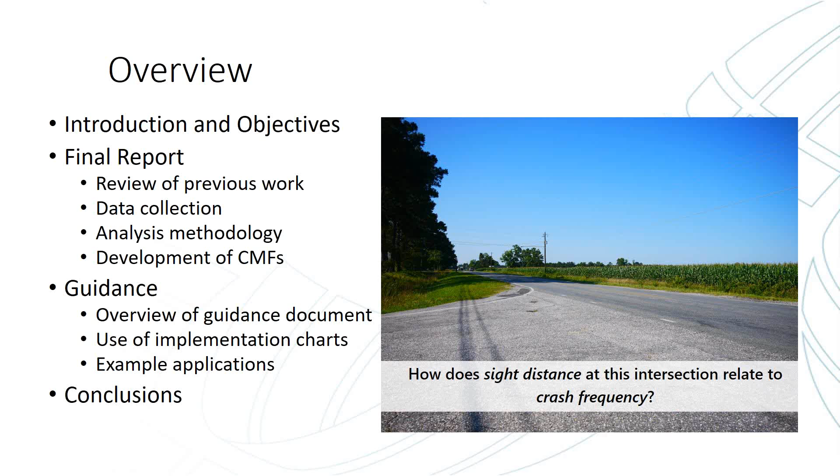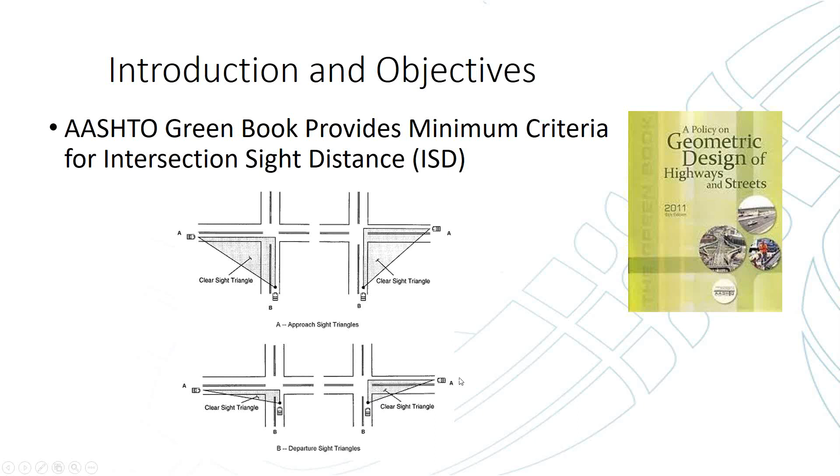If there's a horizontal curve present, we're not actually measuring the hypotenuse of this line, but we're measuring this longitudinal distance on the major road itself, which I'll talk about in greater detail. The criteria themselves can vary according to the minor road traffic control, so we're going to be focusing on case B, which is the departure triangles shown on the previous screen.

They also differ based on the design speed of the major road in which the turning movement is being considered. For example, case B1 in the Green Book gives criteria for left turning vehicles from the minor road. The criteria are based on gap acceptance behavior at this point, and so the criteria can change based on whether there are tractor trailers expected to use the roadway, as well as the minor road approach's grade, which can influence gap acceptance and thus our criteria.

However, leading into this project, we realized that the relationship between intersection sight distance and safety is not fully understood. We don't know how the criteria themselves relate to safety.

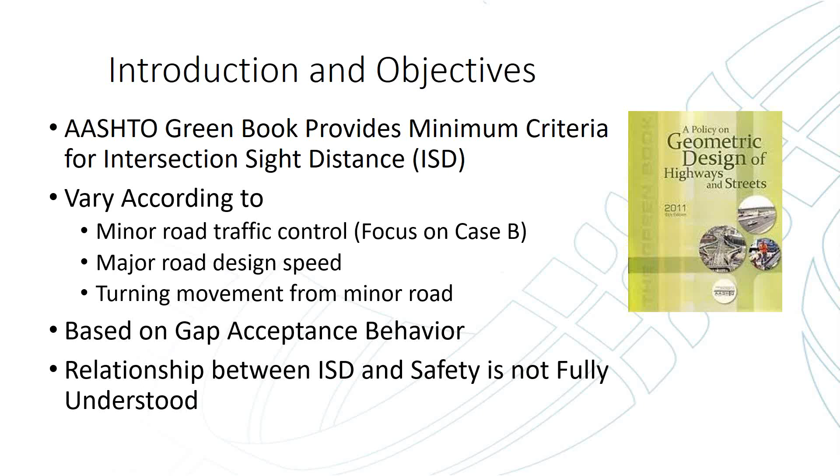So the objectives of this research were to first identify appropriate definitions and existing methods to measure intersection sight distance, and then develop a standardized method for measuring ISD. Once we've measured the ISD, we wanted to establish the relationship between ISD and safety, and then develop practical applications that can help with performance-based design, as well as evaluating the safety effectiveness for roadway safety management practices.

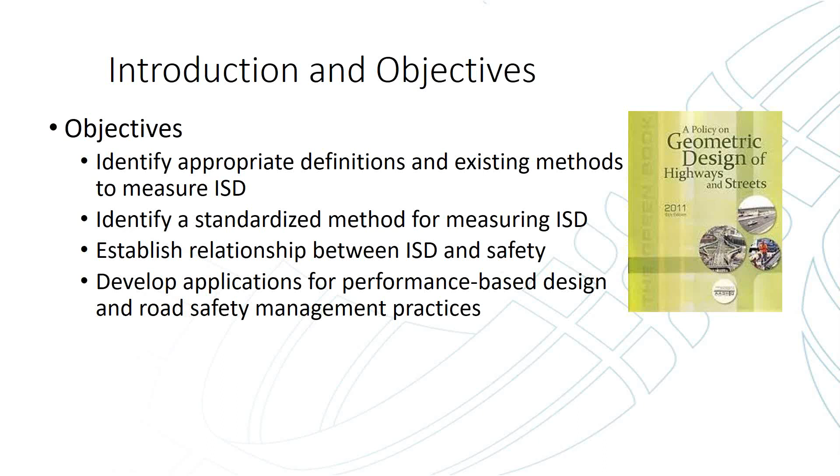Going into this research, we realized there were some key features of the relationship relevant to designers considering intersection sight distance. We felt the relationship was likely nonlinear, meaning that the safety benefit of increasing sight distance, say from 300 to 600 feet, is not necessarily equal to increasing it from 1,000 to 1,300 feet. We're likely to see that the safety benefit should be greater for that 300-foot change when the ISD is shorter.

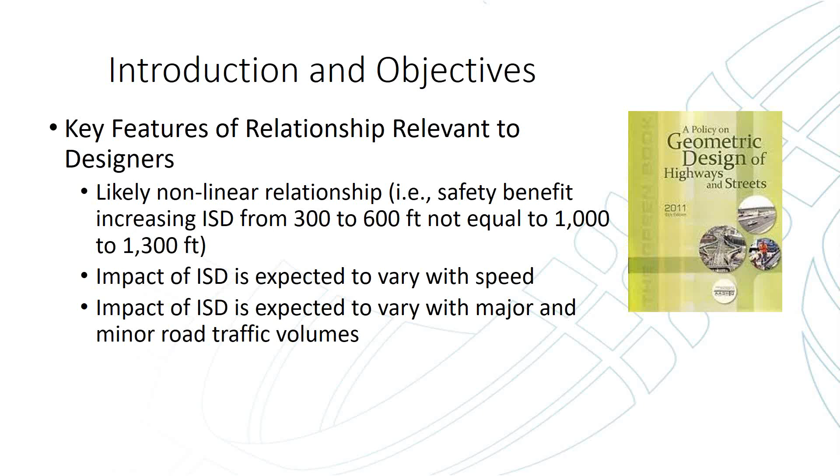We felt like the impact of intersection sight distance is expected to vary with speed, hence why the Green Book criteria vary with speed, and that the impact of intersection sight distance should vary with major and minor road traffic volumes. We anticipated that as the volumes increase, the impact of intersection sight distance would also increase. The theory is, if we had no vehicles that were going to interact with each other, changing ISD is likely to not really have any impact.

Some key terminology going into this: the design intersection sight distance is the minimum ISD as identified by the Green Book. You may see existing or available ISD used throughout this presentation; that is the intersection sight distance as it's actually measured in the field. You'll also see proposed ISD, which might be an intersection sight distance under consideration and expected to result from a change at the intersection environment.

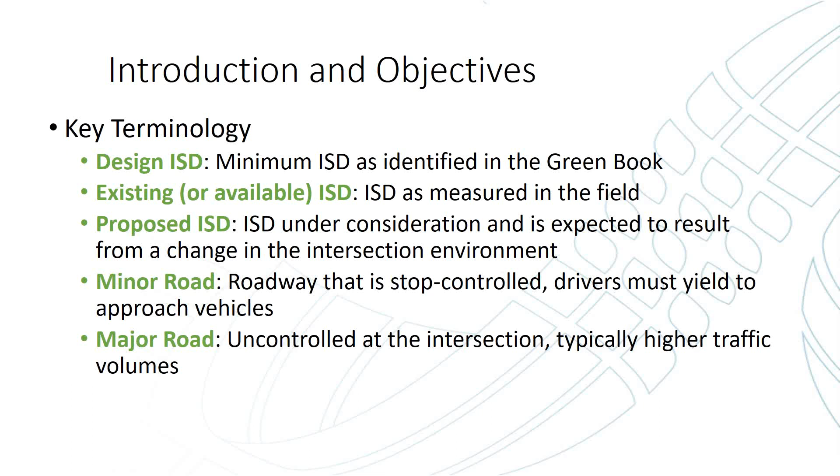The major road in this case is going to be an uncontrolled approach at an intersection, which is typically the higher traffic volume. The minor road approach was defined as the roadway that's stop controlled, where drivers must yield to the approaching vehicles on the major road.

Additionally, crash modification factors, just for background, I'm not sure of everybody's background in safety, but a crash modification factor, or CMF, is a relative change in crash frequency for a change in specific geometry, or a change in crash frequency for applying a treatment - it's a multiplicative factor. So if we had a historic crash frequency or an expected crash frequency, we could multiply that CMF to determine what the future crash frequency is expected to be.

So if a CMF is equal to 1, we're going to say that change has no impact on crash frequency - it's not going to change. A CMF that's less than 1 is associated with a decrease in crash frequency, and a CMF greater than 1 is associated with an increase in crash frequency.

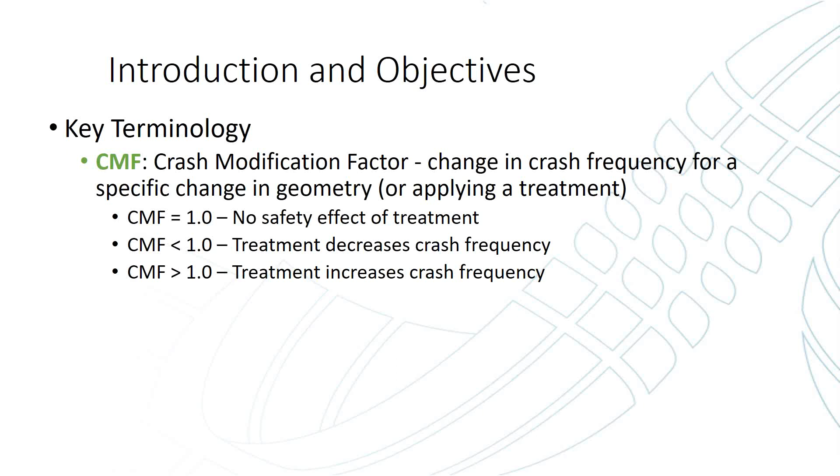CMFs can be developed by crash type and crash severity. For example, if we're looking at putting in a median barrier, we may see that the CMF for total crashes is greater than 1 because we've now put something in the median that can be struck - crash frequency would actually increase. But the CMF for fatal and severe injury crashes will likely be less than 1, since we'd see cross-median crashes reduced, which should reduce crash severity. So we may see different CMFs for different crash types given the installation of even just one treatment.

A CM function, which is what we've developed as part of this research, is a crash modification function. That just implies that the CMF can change due to other roadway characteristics or features.

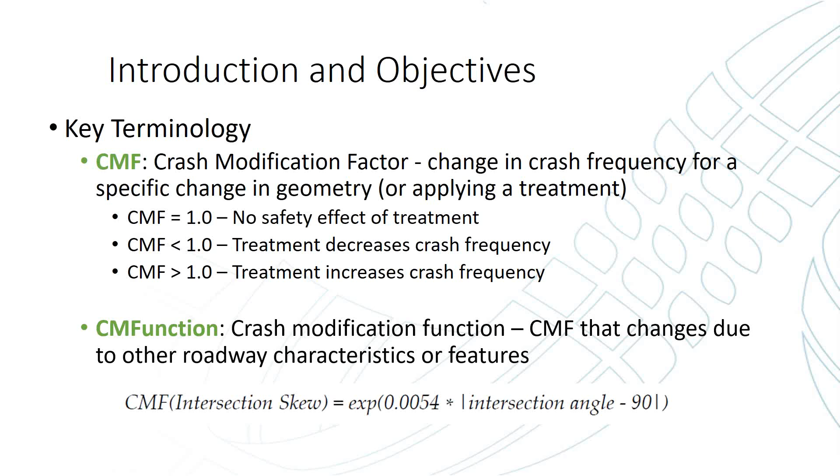We began this research with a short literature review, and what we found was that past research related to intersection sight distance was really inconsistent in the direction and magnitude of safety effects. But the review did provide direction for our data collection plan and identified features we should include in the study design.

We wanted to make sure that when establishing a relationship for intersection sight distance and safety, we accounted for all other features relevant to safety that, if not collected, might get folded into the impact of intersection sight distance.

Also from the literature review, we identified potential countermeasures currently used or that could be used by agencies to improve locations with sight distance concerns. Some relate to sight distance itself, some to delineation. We've included a brief list in the guidance document that I'll talk about later.

We also conducted a review of documented intersection sight distance practices. The purpose was to understand how states and local agencies were defining visual obstructions and collecting ISD measurements in the field. This helped us determine what processes and parameters to follow when developing our protocols for collecting ISD.

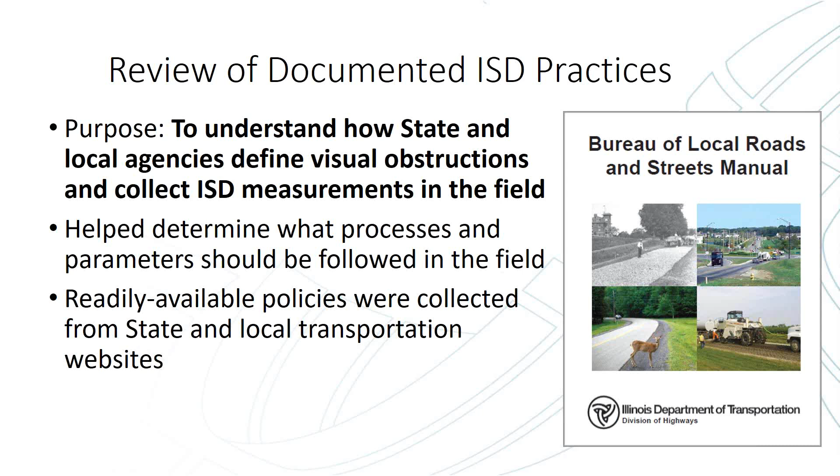We looked at readily available policies online from different state and local transportation agencies. Here on the right-hand side of the screen, you'll see an example from the Bureau of Local Roads and Streets Manual for the Illinois Department of Transportation, which was one that we reviewed.

Most of the reviewed policies did include the AASHTO values, which I'll talk about in another slide or two, for driver eye height and object height, although a couple of agencies used a higher value—4¼ feet for object height—as part of the data collection.

We found that many agencies' policies confirmed acceptance that objects can be located within the sight triangle and not necessarily obstruct the intersection sight distance. With our panel, this was one of the big sources of interest at our first panel meeting.

We were trying to determine at what point we actually cut off our sight distance when we have objects such as small trees in view, where you might be able to see past it, but it does temporarily block your visual view of the major road approach.

What we ultimately decided was that if you could move your head or slightly creep forward to see around the object, then it wouldn't necessarily be considered an obstruction to the intersection sight distance.

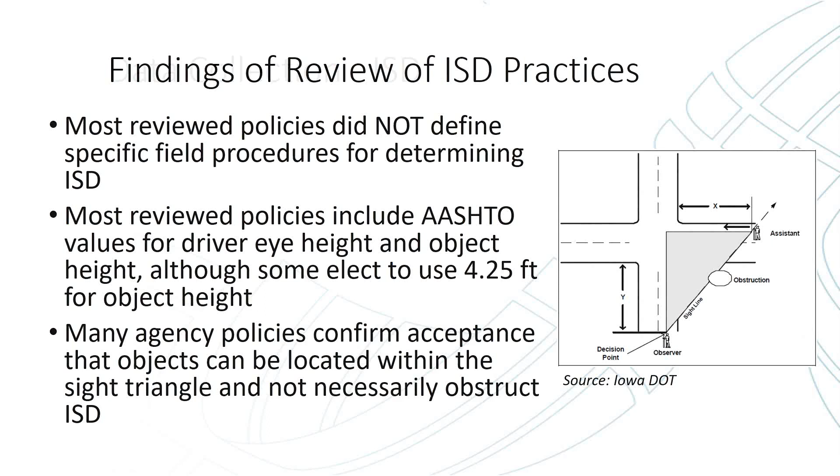For the data collection itself, we captured the intersection sight distance from what's defined as the decision point—the location of the driver's eyes when they pull up and stop on the minor road approach of an intersection.

The Green Book definition, shown on screen, defines the location as 14.5 feet back from the edge of the traveled way on the major road, and on the minor road approach, it's 4 feet over from the center line of the minor road approach.

The idea is that drivers generally stop some distance back from the edge of the traveled way, which we defined as about 6 to 6.5 feet, and then the driver's eyes are located about 8 feet back within the vehicle. But we didn't find anything backing this up in the Green Book as to how this location was really chosen.

So we were also directed as part of this research, at every location where we observed the intersection sight distance, to watch several drivers approach the intersection and look at where they were actually stopping. We recorded that location as the observed location, and then also measured the intersection sight distance from that location.

What we found was that the Green Book was pretty spot on. At 83% of the approaches where we collected data, the actual point where the driver's eyes were was 14.5 feet back from the edge of the traveled way. So ultimately, we felt comfortable recommending using the Green Book definition of 14.5 feet for the decision point.

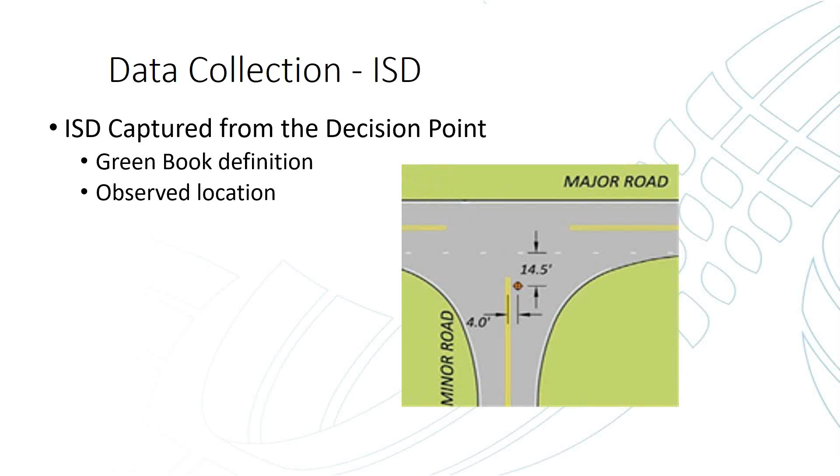Then we also wanted to look at the driver and object height, which, as defined by the Green Book, is 3.5 feet in both cases, or 42 inches. So we developed a target that can be used to measure the sight distance when one person is walking down the roadway to find the point where the sight distance ends.

The bright sign helped us keep an eye on the targeter, as well as the arrow pointing down to the bottom of the sign, which provided a really good location to identify exactly where that 42 inches is when they're hundreds of feet or 1,000 feet or more away.

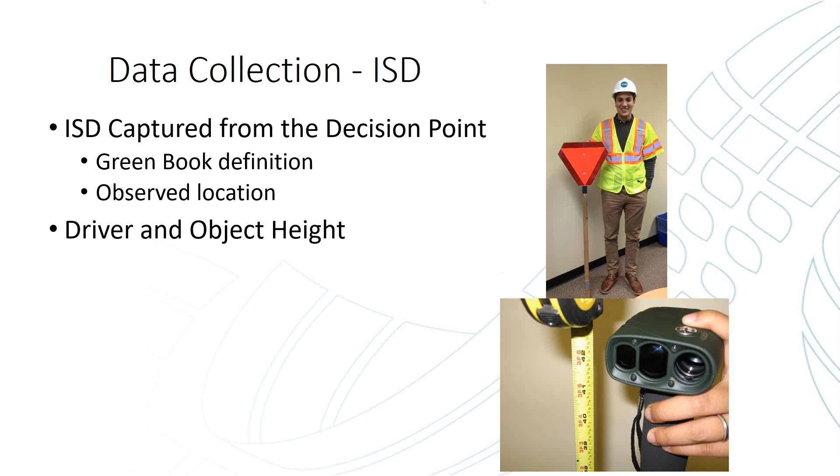Additionally, we were interested in making sure that when we were collecting intersection sight distance, particularly because we had 3 different field collection teams, the field collector's vision did not determine where the potential end of the sight distance was. So we found that we could use a laser rangefinder mounted on top of a monopod that had a scope giving us 4-power resolution. This took our sighter's vision out of the equation to determine where the end of the stopping sight distance is.

So we used 2-person field teams, with one person being the targeter, which it's a little hard to see from this graphic, but you can see the targeter further down the roadway here with the sign in the roadway. This would be taken from about the location where the sighter would be standing, at the decision point itself, to observe the targeter. They communicated with 2-way radios to tell the targeter when to stop and where they could measure the intersection sight distance.

Additionally, we used a maximum sight distance of 1,320 feet, which is a quarter of a mile, since anything beyond that is not likely to help in any way. In some cases, the ISD may actually be a mile or more, and we felt it wasn't really worth the effort and time to send the person all the way to the edge of the sight distance to calculate it. So we actually cut it off at a quarter mile.

And you can also kind of see, going through our pictures, that throughout the data collection period in the North Carolina sun, our targeter was an intern who lost about 30 pounds from running back and forth collecting the ISD all summer.

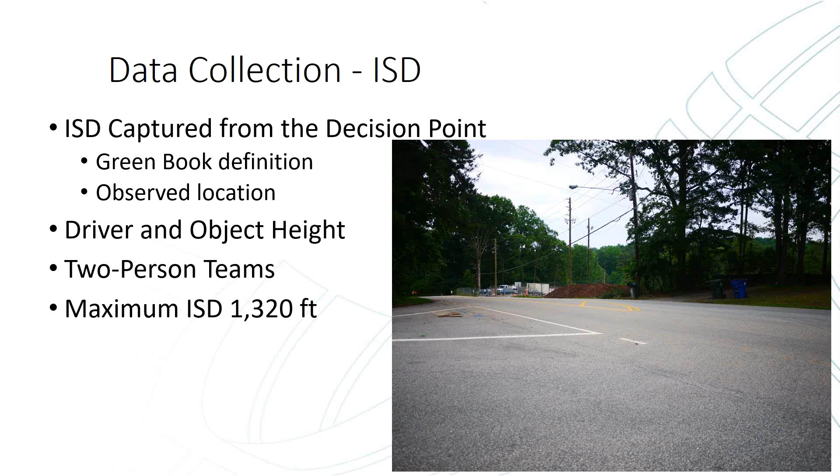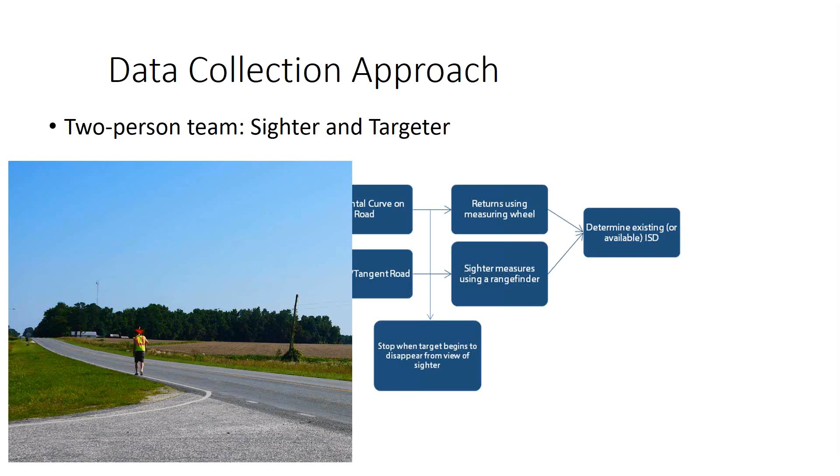So our two-person team, the sighter and the targeter, used the data collection approach shown here. The first step was for the targeter to move from the decision point down the edge of the traveled way, or in an urban environment, use a sidewalk, to begin looking for the end of the sight distance.

Depending on whether it was a horizontal curve or the roadway was a straight tangent, would determine how we measured the sight distance. But the next key step was to determine when the targeter reached the end of the sight distance. The targeter would go to the center of the travel lane and place the target, and the sighter would communicate to tell them when to stop and take the measurement.

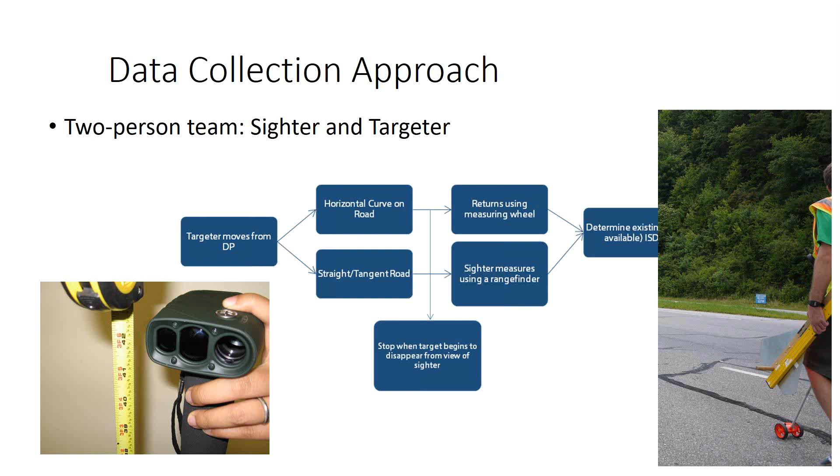Once they found the location where the target began to disappear from the view of the sighter, if it was a horizontal curve, the sight distance was measured while the targeter was returning, using a measuring wheel, as shown on the right-hand side of the screen. If it were a tangent, the sighter was able to use the laser rangefinder to find a close approximation of the sight distance, which then determined the existing or available intersection sight distance for that intersection.

Once we had determined the intersection sight distance, we had to associate that sight distance with crashes and other features as part of our analysis database. What we ultimately decided for this research was that intersection sight distance is associated with a certain target crash type. We defined our target crashes as all crashes involving a vehicle from the minor road and a vehicle from the major road.

We looked at total target crashes as well as fatal and injury target crashes. Our analysis unit for this was not at the intersection level or even the intersection approach level. Our analysis focused on each of the individual sight distances that we collected.

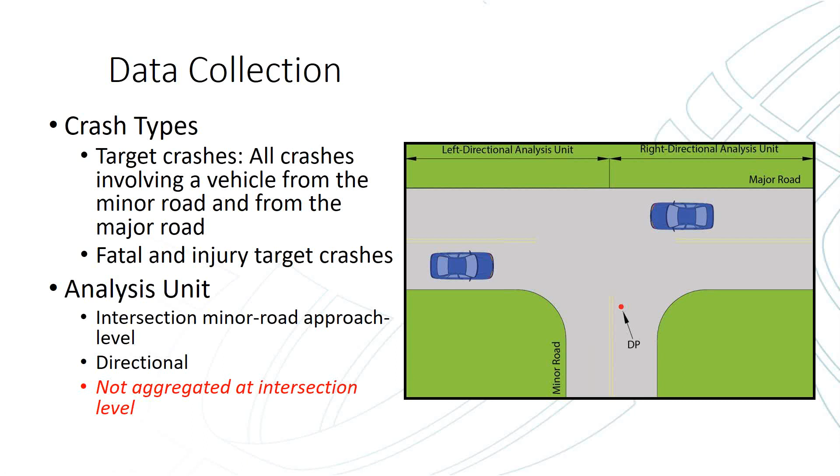We also collected other data, and I'm defining the relevant data as the data elements we collected that were found to be significantly associated with target crashes. We accounted for those in the model by including the major road traffic volume, the minor road traffic volume, and the intersection sight distance that was available.

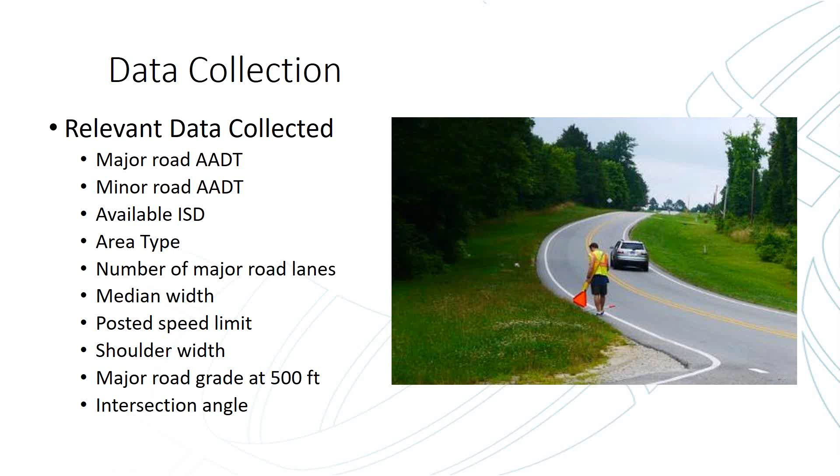We had also collected data in urban and rural areas, so we found area type to be significantly associated, as well as the number of lanes on the major road, the median width, the posted speed limit, the major road shoulder width. We also looked at the major road grade at 100 feet, 250 feet, and 500 feet prior to the intersection, and found that the major road grade 500 feet before the intersection was also associated with target crash frequency, as well as the intersection angle.

We looked at some other data elements that we did not find to be significant within the models. Those included the visibility of the traffic control device. What we were really looking for was whether vehicles approaching the intersection on the minor road could actually see the stop sign for a significant distance, or if they could not see it before needing to stop. What we found was there were no real visual obstructions for the stop sign, so there wasn't enough data to look at any potential visibility issues.

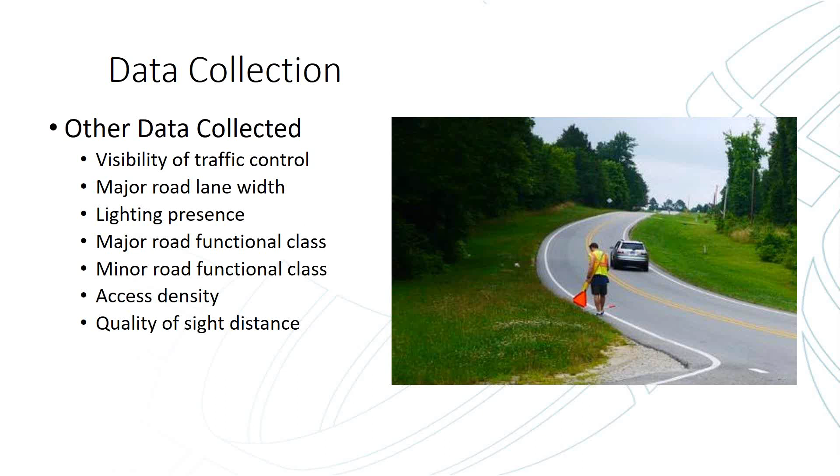We also looked at the major road lane width, whether there was any lighting present at the intersections, the functional classes of the roadway, access density within about 250 feet of the intersection, and another measure we had been considering as part of this research: the quality of the sight distance.

For the quality of the sight distance, we worked with the panel to look at objective and subjective measures to define what might be a good sight distance quality. When I talk about quality, independent of the length of the sight distance, it can be difficult to determine how far a vehicle is and how fast it's traveling when you're looking down the major road leg at the intersection while stopped on the minor road approach.

The panel felt that one potential way to look at this is to use objects in the background to help gauge the distance to the vehicle and how fast it's traveling. We initially looked at an objective measure which quantified how many objects were in that sight triangle, on the far side or near side, that would help you gauge whether or not you could see that vehicle's distance.

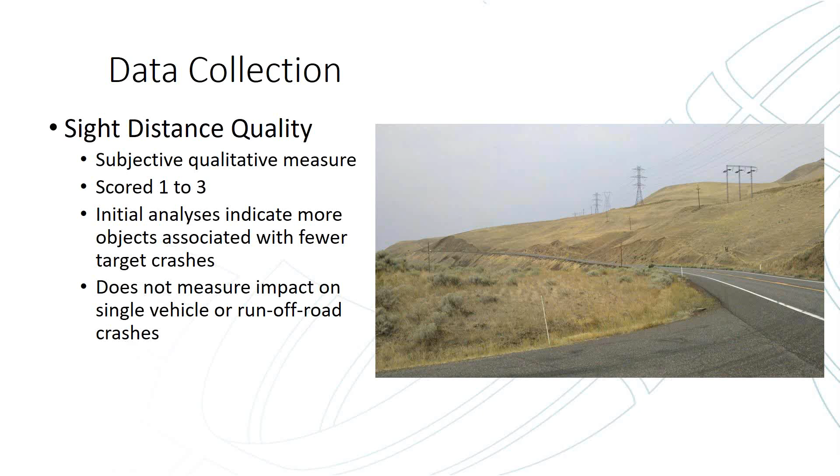Ultimately, we decided to look at a more subjective measure, rating from 1 to 3, where 1 is a low sight distance quality - an example is provided where there's really no object to tell you how far away a vehicle is or how fast it might be moving - versus a 3, where you can see telephone poles that are evenly spaced, as well as trees and other objects that may help you gauge the distance to that vehicle when performing your gap acceptance maneuver.

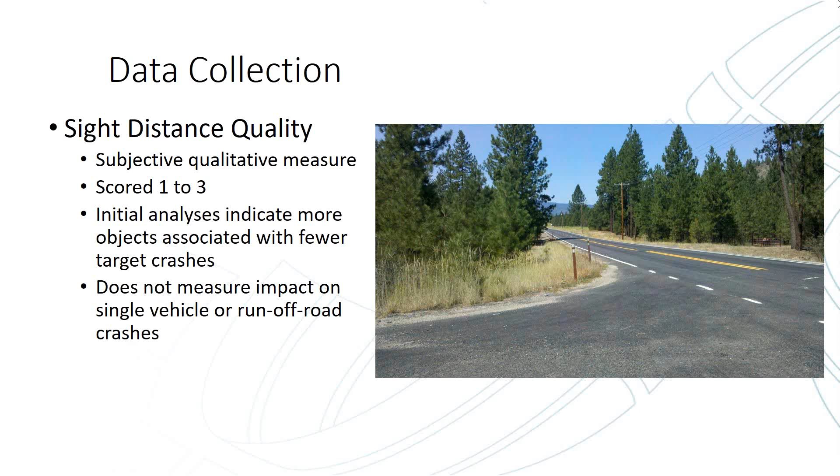The initial analysis indicated that having more objects was associated with fewer target crashes, so sight distance quality 3 did seem to help reduce target crashes, but it didn't account for any impacts to single vehicle or runoff road crashes because we didn't measure it. It's more likely that having those objects there was just counterintuitive to safety in general, so we felt it wasn't good to include it, and we did not proceed further with it in the analysis.

For our data collection, we had 3 states, all highway safety information states, HSIS. The crash data and roadway data were readily available from Federal Highway, and also due to proximity to our location teams, since we were located in Ohio, Washington, and North Carolina, we had really good access to those states to collect the field ISDs.

In total, we traveled to more than 600 intersections and calculated the available intersection sight distance for 832 intersection approaches. The sites visited are shown on the map here - we looked at central and northwestern Ohio, pretty much across North Carolina because of its varying topography, including the Sand Hills flat area, the Piedmont with rolling terrain in the middle, and a very mountainous section in the western part of the state.

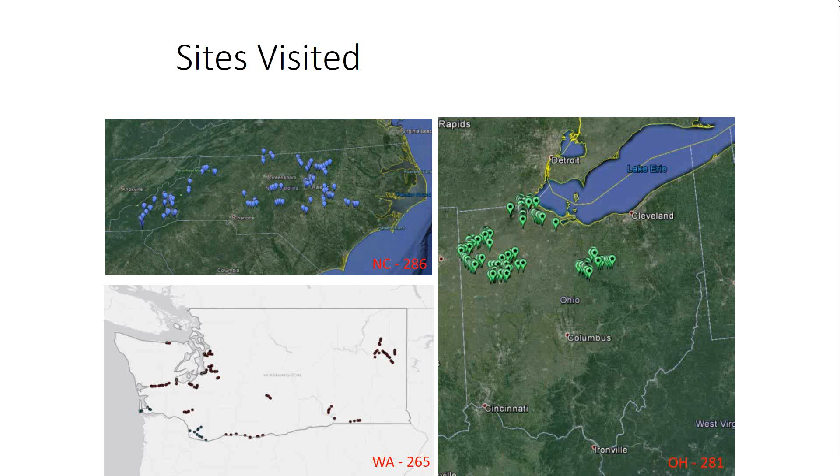In Washington, we also looked at sites across the state with varying topographies. For the number of approaches, it wasn't specific to any facility type or area type - we had a really good mix of rural and urban sites, about 400 sites on 2-lane roads, and a strong sample of about 400 sites on 4-lane roads, split between divided and undivided major roads.

In total, we had a little over 800 approaches that we got the sight distance for, and we used 4 years of crash data for our modeling. Initially we wanted to look at 3 years, trying to keep the time period shorter because sight distance can really change over time - as foliage grows and trees get larger, it can change the sight distance. So we tried to minimize the impacts of that growth by using 3 years of data, but we found the crash samples were pretty low.

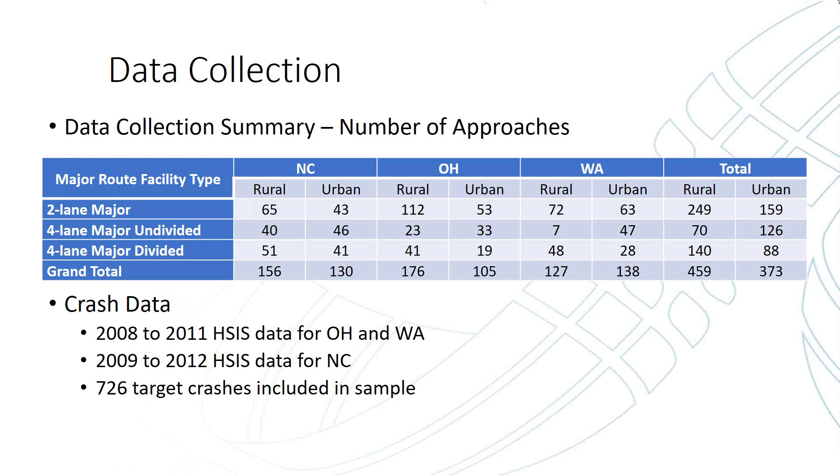So we expanded the data collection to include more sites to help bolster that, as well as decided to collect an additional year's worth of data, because we were looking at a specific crash type and did not target the intersections based on safety history. So there were lots of intersections where no crashes had occurred, and in total our sample had 726 target crashes included in it.

For our analysis methodology, I wanted to highlight that we used the traditional state of the practice: cross-sectional negative binomial regression, and we really tried to pay attention to a lot of potential biases that can enter our analysis. We paid a lot of attention to the functional form of the variables that went into our model, looking at the major road and minor road traffic volume separately, as well as total entering traffic volume, and accounted for state-to-state differences by including indicators for each of the states.

We also paid attention to correlation among the independent variables - for example, traffic volume and number of lanes tends to be highly correlated with each other, so we made sure that if we included both in a model, they weren't highly correlated with each other, which can impact the results. Then there's overfitting the prediction model - we only had 726 crashes, so we needed to really pay attention to where we had small crash sample sizes as part of our analysis.

So you'll see in a couple more slides that we had to look at ranges of traffic volumes for our analysis rather than including it as a continuous variable, to ensure we were capturing the full range and not missing ranges of ADTs when implementing the results. Low sample size led us to increase the sample, both in the number of years we collected and the number of sites.

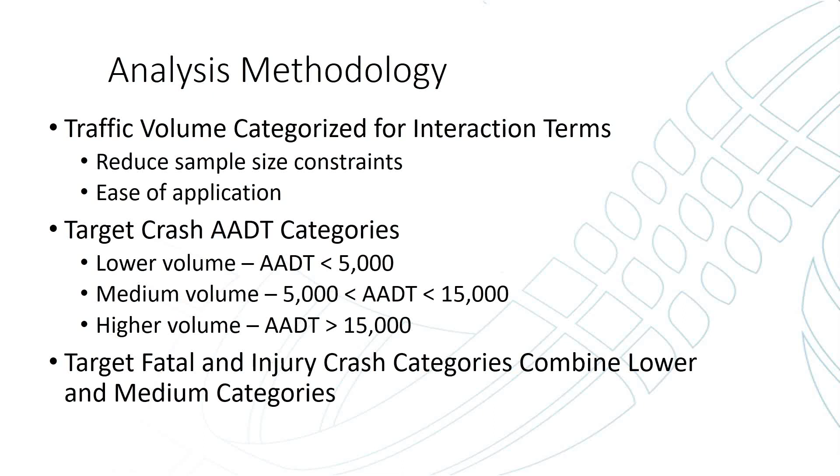To capture the potential effects that might be relevant to designers, we used interaction terms in the models. Any variables that were interacted with intersection sight distance were found to change based on those features. So we looked at speed limit and what impact it has on intersection sight distance and safety, and then the major and minor road traffic volumes.

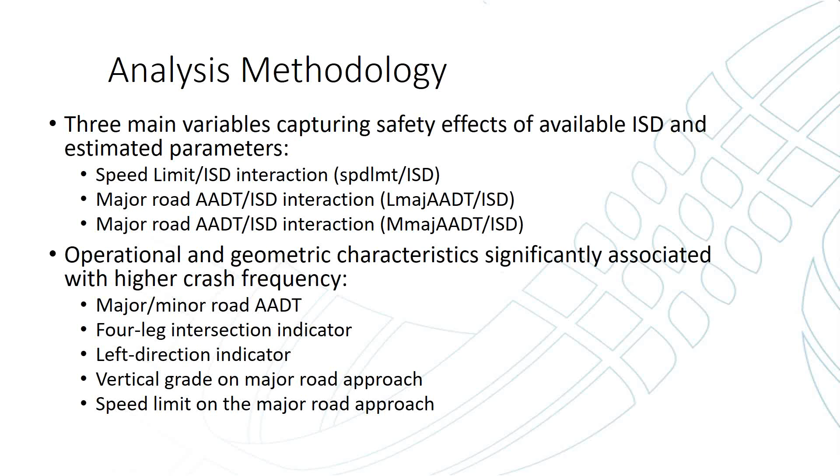We also found other operational and geometric characteristics associated with higher crash frequency, but that weren't found to change the effect of intersection sight distance on safety. The number of legs was found to impact safety, but we didn't find a difference in the impact of ISD whether it was a 3-leg or 4-leg intersection, or whether it was the left or right direction you were looking in. But we did find that the left direction was associated with more target crashes than the right direction. And then also the vertical grade.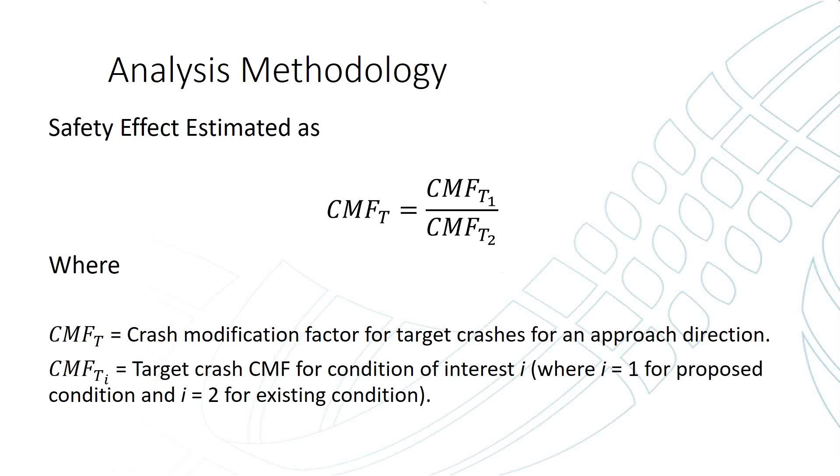From our results, the safety effect or crash modification factor can be calculated by taking the CMF for the condition of interest, which might be the proposed or existing condition, and dividing one by the other. So we can develop a CMF for a new proposed ISD and compare that to the existing condition to find out the CMF for changing it.

Because of the interaction terms we included, the CMF equation for target crashes, when comparing a proposed to an existing condition, looks a bit convoluted and can be difficult to use. This is why we were trying to develop practical charts.

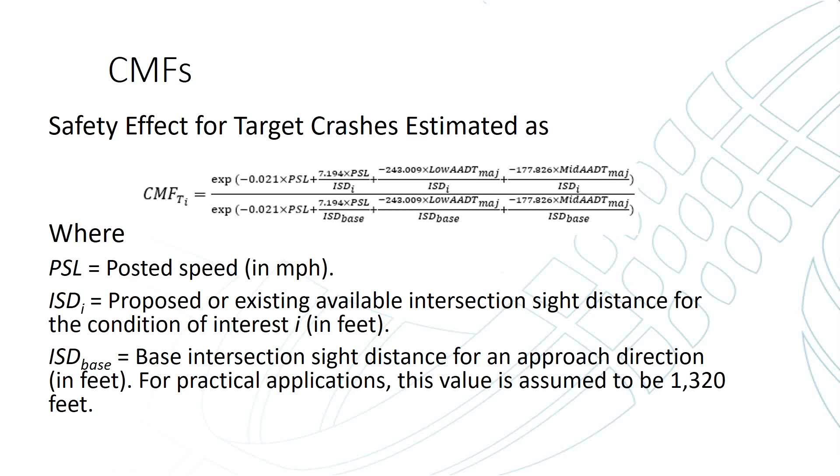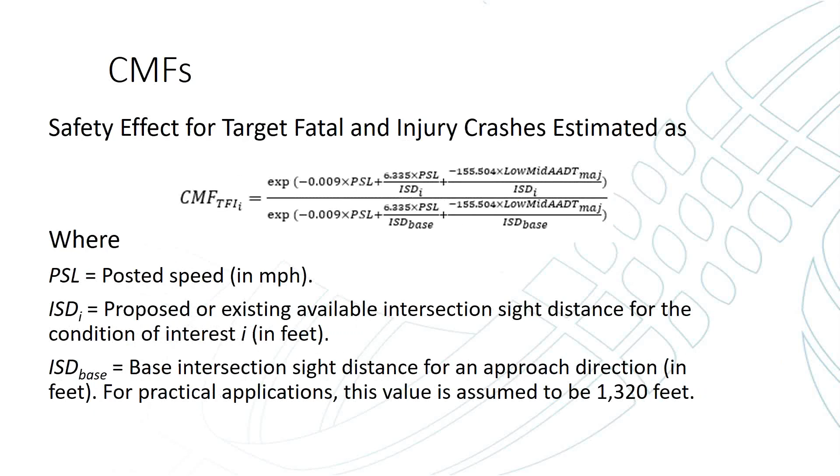In this case, if we wanted to compare to a relative base condition, we chose the quarter-mile distance, which was the maximum value of ISD we collected, as a base condition for safety here. We had a similar equation for target fatal and injury crashes, but there's one less indicator because we only included high and low ADT.

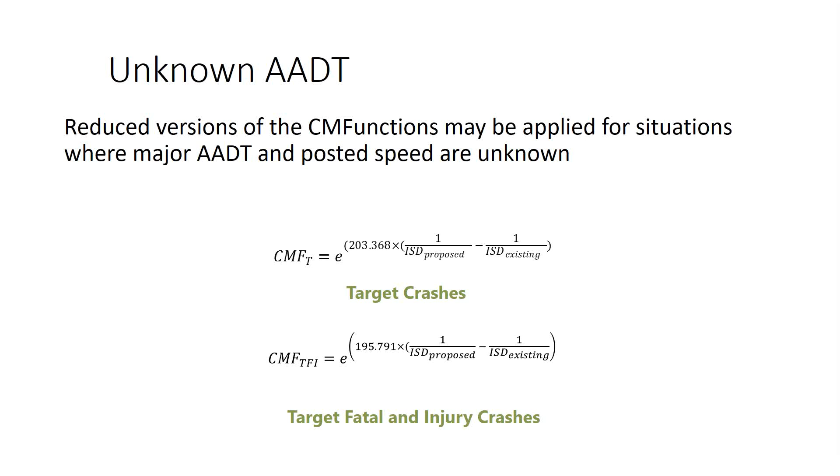Additionally, in cases where traffic volume is unknown, we developed reduced versions of the CM functions that can be applied. In this case, you can use the CMF to estimate what the change in crashes would be from proposed to existing conditions independent of traffic volume. But if traffic volumes are known, the CM functions presented previously would be more reliable and accurate.

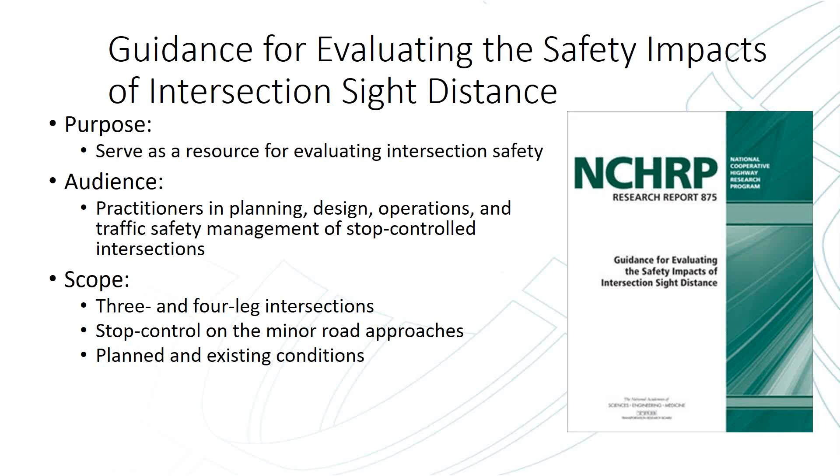Having completed the research, I'm going to now talk about the guidance for evaluating the safety impacts, NCHRP Report 875. The purpose of this report is to serve as a resource for evaluating intersection safety, and the audience is pretty broad—practitioners in planning, design, operations, or traffic safety management of stop-controlled intersections interested in the safety effects of ISD. The scope for this document is for 3- and 4-leg intersections with stop control on the minor road approaches, and it can be used for planned or existing conditions or intersections.

The organization has 6 chapters in this guidebook. The first is just an introduction, which talks about the purpose, scope, and how to use the guidance, and provides an overview of definitions and acronyms used throughout the research and guidance. Chapter 2 briefly focuses on measuring sight distance and other critical information—the data collection approach used, how to collect intersection sight distance, how to calculate or determine traffic volumes if unknown, as well as how to identify target crashes and get them from historic crash data.

Chapter 3 focuses on the safety performance of intersection sight distance, which I'll talk about in more detail here because the practical applications are provided in this chapter. The steps in this chapter are determining the crash modification factor, with sections for analyzing more than one approach and then analyzing total crashes. So if we wanted to look at one approach direction that we got ISD for and calculate a total crashes CMF or a total intersection CMF, the steps are provided here to do that.

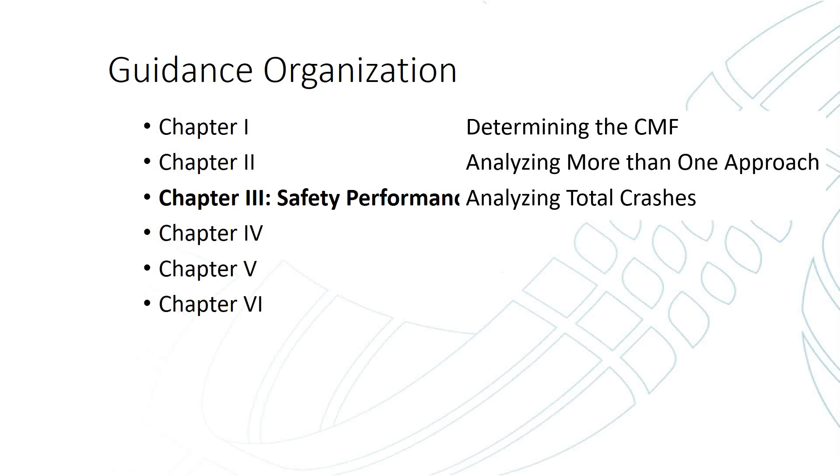The CMFs shown a few slides ago were translated into 12 practical charts. The charts are separated by target crash type—6 charts for target crashes and 6 for target fatal and injury crashes—and they vary by posted speed limit. The charts are applicable for 35 to 60 mile per hour posted speed limits on major road approaches. The ADT on the charts is treated as group data as included in the model, and cannot really be refined—you can't interpolate between the curves on the chart.

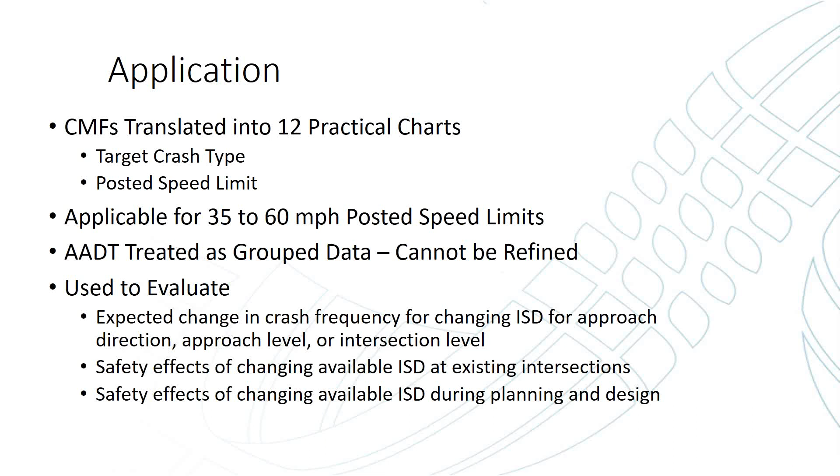The charts can be used to evaluate the expected change in crash frequency for changing ISD for either an approach direction, both directions of an approach, or for all approach directions at the intersection level. So you can evaluate safety effects of changing the ISD at existing intersections or changes during planning and design.

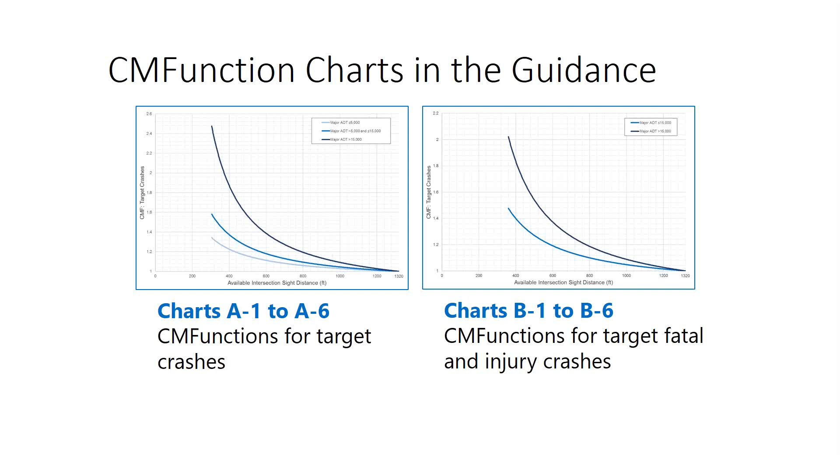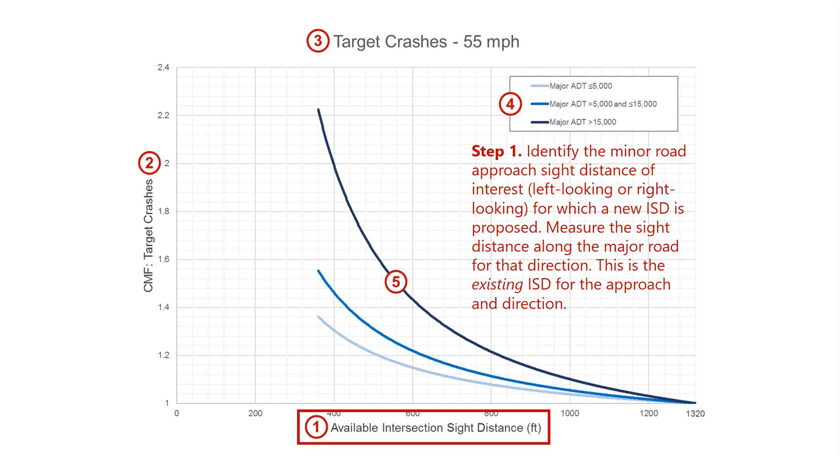So there are 5 steps to determining the CMF from the charts. The first step is to identify the minor road approach sight distance, whether it's left looking or right looking, for which you're proposing a new intersection sight distance. You'd measure the sight distance along the major road for that direction, and that would be labeled as the existing ISD for that approach direction.

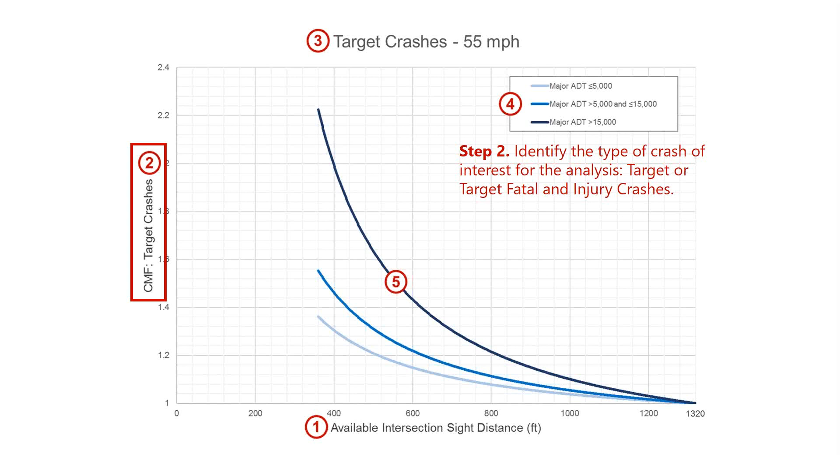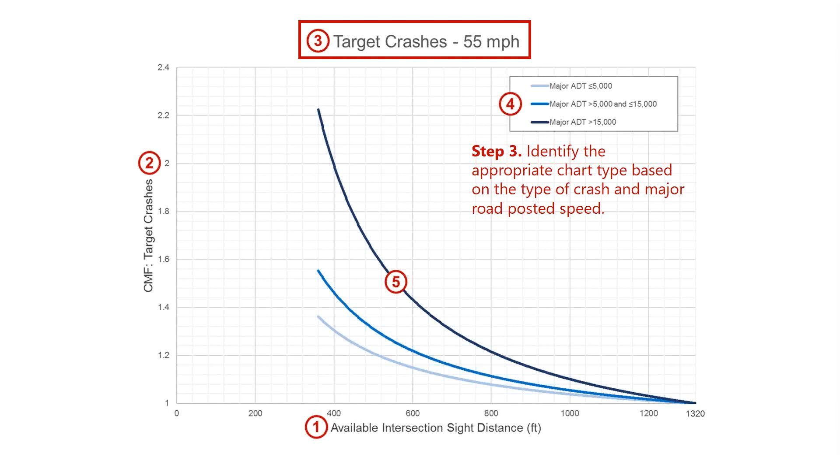Step 2 is to identify the type of crash of interest for the analysis, looking at the target crashes chart or the target fatal and injury crashes chart. The third step is to identify the appropriate chart type based on the type of crash and the major road posted speed, which can range from 35 to 60 miles per hour. In this case, we'd be interested in a 55 mile per hour posted roadway.

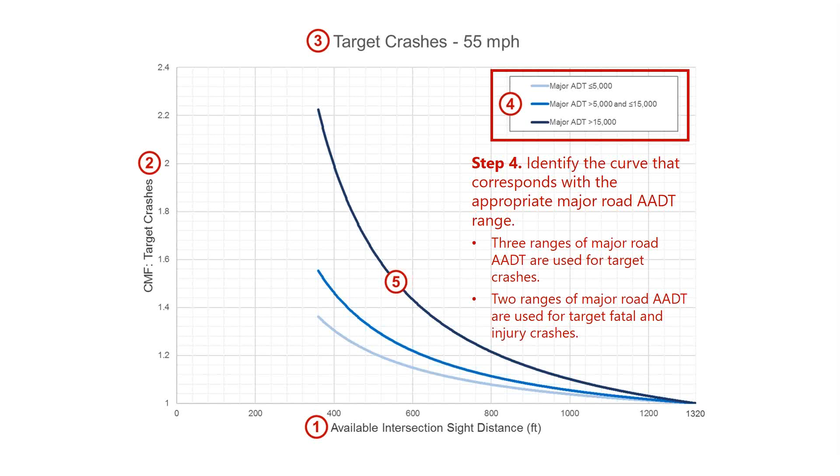The fourth step is to identify the curve that corresponds with the appropriate major road ADT range. Based on the ADT of your roadway, you would select one of the 3 curves in this case, or 2 curves for target fatal and injury crashes.

And finally, the 5th step is to use the curve to plot the existing and proposed ISD. If any of the intersection sight distance exceeds 1,320 feet, you would just use 1,320 feet and the CMF would be 1. In this case, if we wanted to compare 2 relative changes to ISD, we could look at the CMF for the major road ADT being greater than 15,000.

If the existing is 600 feet, you'd see the CMF is about 1.45. And if you wanted to propose a new ISD that were greater than 1,320 feet, let's say if we removed a sign from the roadside in this case, we would get a longer sight distance that's more than a quarter mile. We could compare that to the CMF of 1. So we would take the CMF of 1 and divide it by the existing, which is 1.45, to get our new CMF that would represent the reduction. I have some examples here to illustrate that approach.

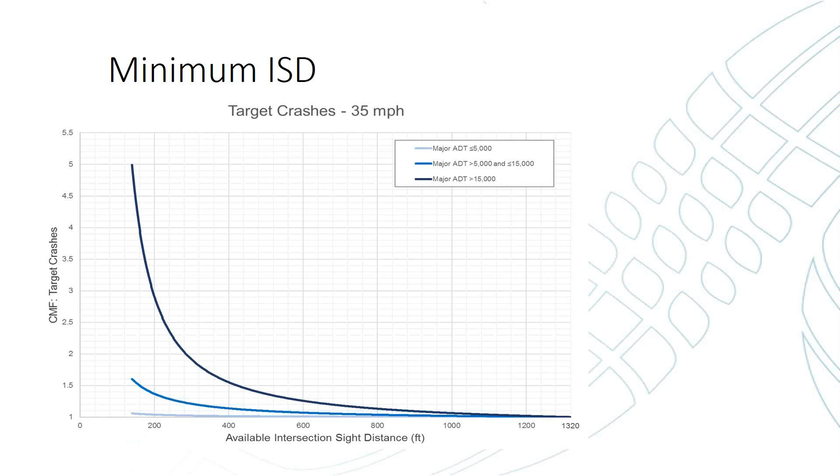Additionally, you'll see on the charts that the curves cut off at different values for the minimum sight distance. What we found was that there were small sample size issues, and so for any cases where we did not have data at sight distances below that, we did not extend the chart. For target crashes with a posted speed limit of 35 miles per hour, we did not have any sites with less than 150 feet of intersection sight distance. Going back a slide, for 55 miles per hour, we did not have any sites with less than 350 feet of sight distance. So it's not too common to go out onto high-speed roadways and find very, very small ISDs.

We did see that relative to the design sight distance, we had some sites that were deficient, but we didn't have any that were just ridiculously deficient. So we cut off the curves where we did not have any data to support the analysis further.

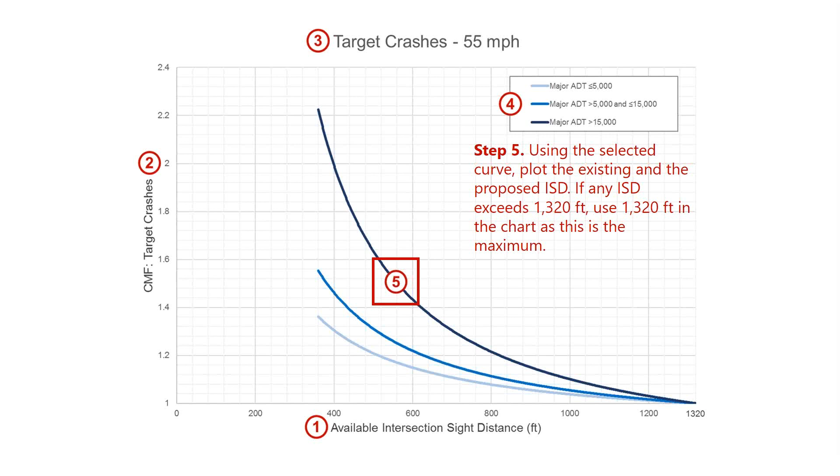Moving into chapter 4, this is where we have some example applications. The applications listed, which I'll go through now, are first for a one-direction ISD upgrade. So if we have just one approach in one direction of an intersection that we want to upgrade the ISD, how would you calculate the safety effectiveness?

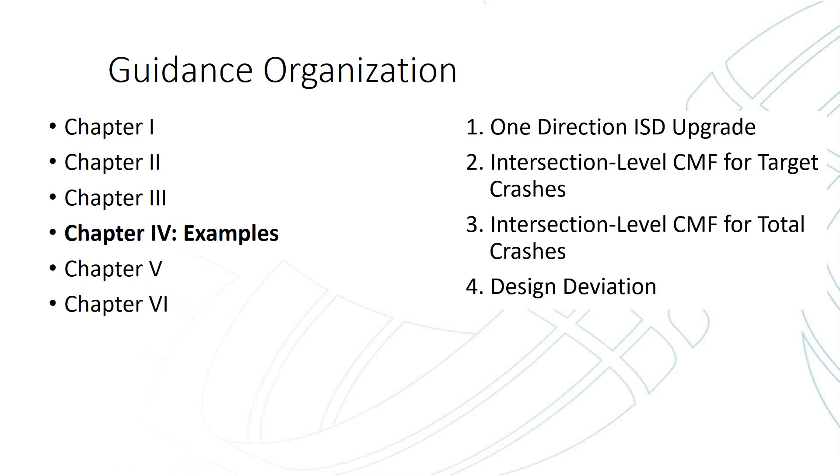The second example is calculating an intersection-level CMF for target crashes. If we were only looking at one or two approach directions that we wanted to upgrade the sight distance, what would the impact be overall for the intersection? Our third example looks at an intersection-level CMF for total crashes. So if we know that we can only calculate the effect on target crashes, what is the impact to total crashes at the intersection? And our last example is a design deviation, calculating what the CMF would be if we can't meet the minimum criteria in a certain case for intersection sight distance.

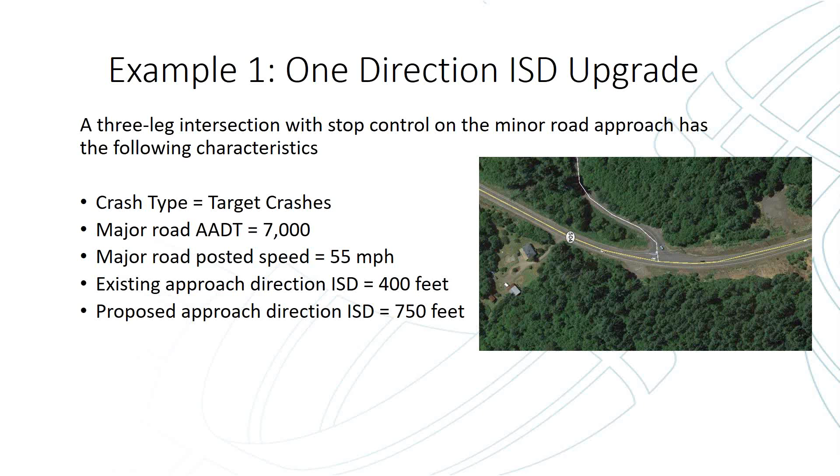For our first example, a one-direction intersection sight distance upgrade, we have a three-leg intersection with stop control on the minor road approach, with the following characteristics: we're interested in target crashes, the major road volume is 7,000 vehicles per day, the major road posted speed is 55 miles per hour, and the existing approach direction ISD of interest is 400 feet. We're proposing to remove a couple of trees, which would increase the sight distance to 750 feet.

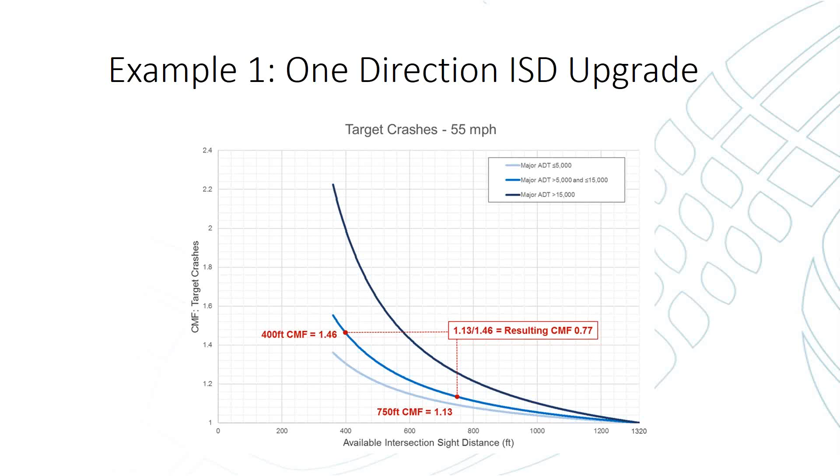So we can look at our practical chart, where we've determined the existing is 400 feet, the CMF is for target crashes, the posted speed limit is 55 miles per hour, and our ADT was 7,000 vehicles per day, so we're going to use the darker blue line in the middle. We're going to compare the existing, a 400-foot sight distance, which gives us a CMF of 1.46, to the increased sight distance of 750 feet, which gives us a CMF of 1.13. Taking the new CMF divided by the old CMF tells us that changing the sight distance at this approach direction from 400 to 750 feet will reduce target crashes by 23%, giving us a CMF of 0.77.

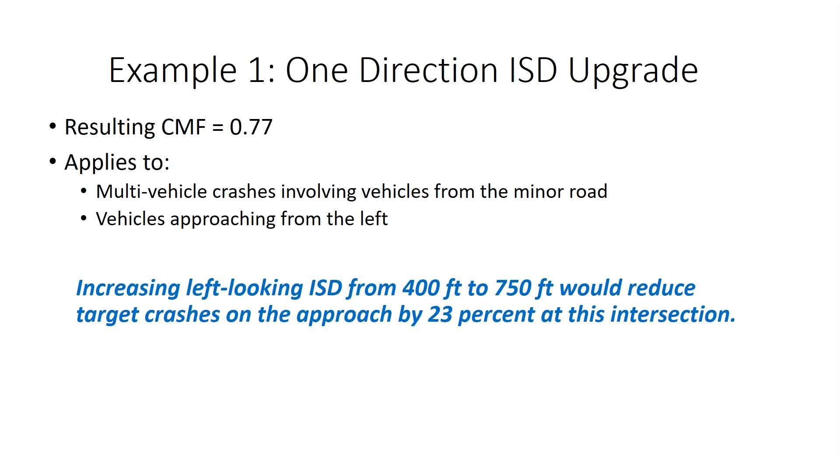So the resulting CMF is 0.77. It applies to multi-vehicle crashes involving vehicles from the minor road. Because this was left-looking only, it only applies to vehicles approaching from the left. So our takeaway is that increasing left-looking ISD from 400 to 750 feet would reduce target crashes on the approach direction by 23% at this intersection.

For our second example, we can calculate the intersection level CMF for target crashes. So for this one, we have a 4-leg intersection that has stop control on the minor road approach, and it has the following characteristics. Again, we're looking at target crashes. The major road ADT is 20,000 vehicles per day. The major road posted speed limit is 40 miles per hour. And we're interested in updating or upgrading the northbound approach's ISDs.

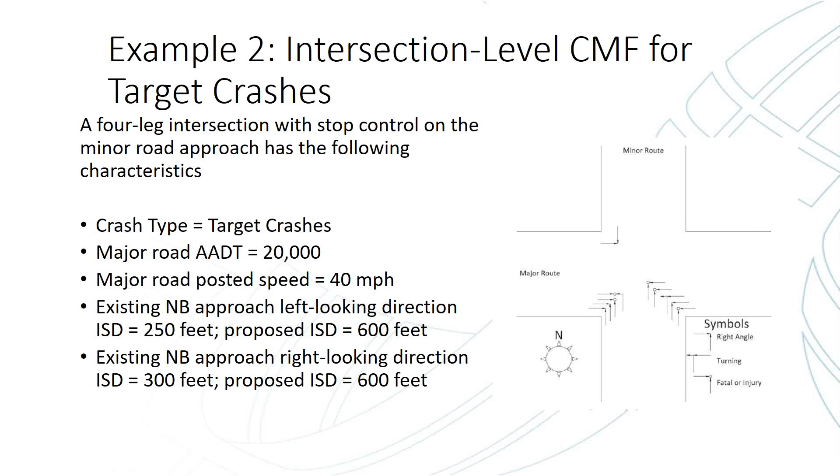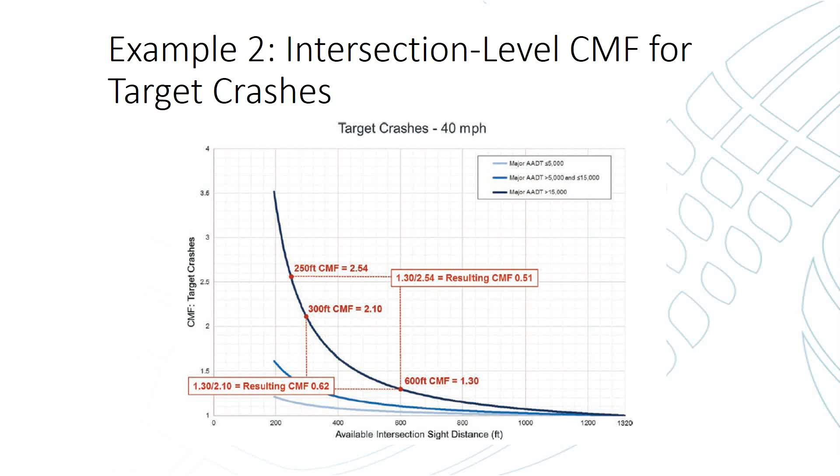So again, we can look at our available intersection sight distance. We've been given 250 and 300 feet. We're going to improve those to 600 feet. The CMF is for target crashes. The posted speed limit is 40 miles per hour. Our major road ADT was 20,000 vehicles per day. So we're going to use the darkest line on this screen. And you'll see that improving the sight distance from 250 to 600 feet results in a CMF of 0.51 for target crashes, and the CMF for increasing from 300 to 600 feet is 0.62.

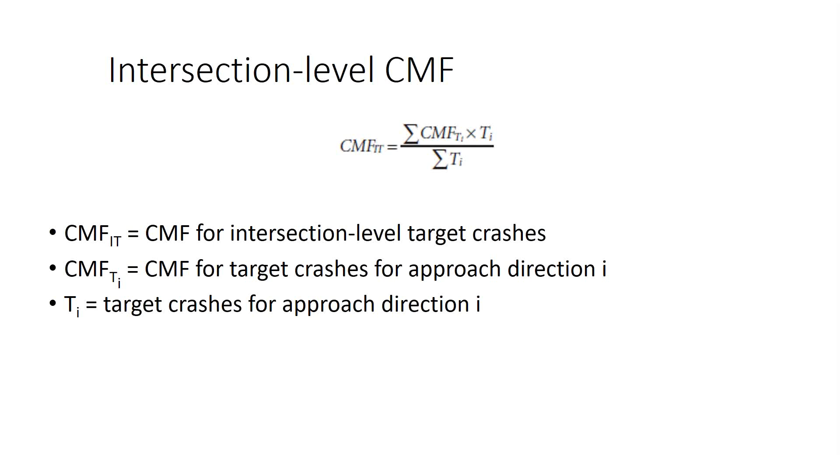So to calculate an intersection level CMF, we can take the CMF multiplied by the number of target crashes for each of the approach directions and divide them by the sum of all the target crashes for the intersection, which is shown on this slide. So again, we had 4 crashes for the left-looking northbound approach. The CMF was 0.51. For the right-looking direction, we got a CMF of 0.62 and had 5 crashes. And then we're going to substitute a CMF of 1 in for the southbound approaches because we're not changing anything, and we only had 1 crash that occurred on the southbound approaches. So including those and then dividing by the total number of target crashes, you'll see that for the entire intersection, our CMF is 0.61 for target crashes.

And this applies to multi-vehicle crashes involving a vehicle from the minor road, and it applies to the entire intersection. So we could say that increasing the northbound intersection sight distance for both sight lines to 600 feet would reduce target crashes at the intersection by 39%.

So our third example would be taking the intersection level CMF for total crashes. It results in using similar information, but we need to know the total number of crashes that occurred at the intersection. So our example here, we have a 4-leg intersection with stop control on the minor road approaches. The major road ADT is 17,500 vehicles per day. We're looking at target crashes. The major road posted speed is 60 miles per hour. And in this case, we're going to remove an object in each of the ISD approaches that'll increase it beyond 1,320 feet.

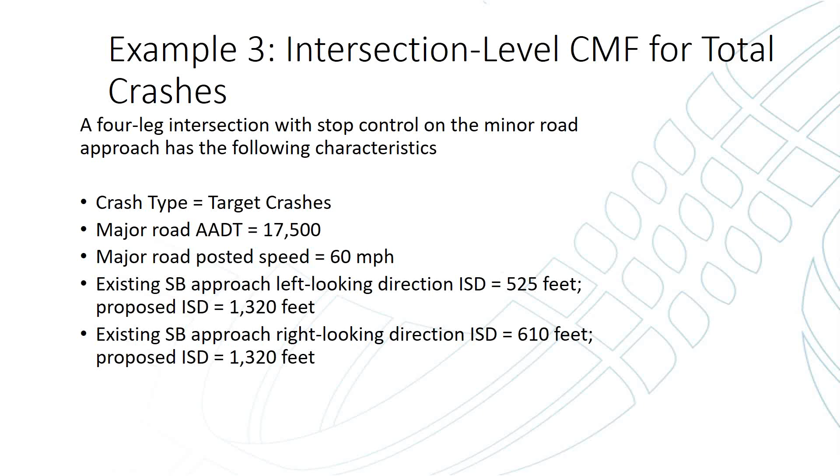So we're going to use the maximum value in this case. And our beginning ISDs are left-looking at 525 feet and right-looking at 610 feet. So for 3 years of crash data, our southbound left-looking direction, we had 5 target crashes. Right-looking, we had 7 target crashes. Overall for the intersection, we had 16 target crashes. And we know that the proportion of target crashes to total crashes is 55%.

So first we can go to our charts. We identify that we had the 525 and 610 feet of sight distance. We're improving those to 1,320.

The CMF is for target crashes. It's cut off here, but this does apply to a 60 mile per hour posted speed limit. The ADT is more than 15,000, so we'd use the dark line on top.

And we can calculate the CMFs for our two approaches that we are updating. For our left-looking approach of 525 feet, upgrading it to 1,320 feet gives us a CMF of 0.61. And for our right-looking, updating from 610 feet to 1,320 gives us a CMF of 0.68.

So we can calculate the CMF for the total intersection for target crashes using the methodology we used before. So while we had the CMFs of 0.61 and 0.68, we have a CMF of 1 for the other two approach directions, which gives us an overall target crash CMF of 0.74.

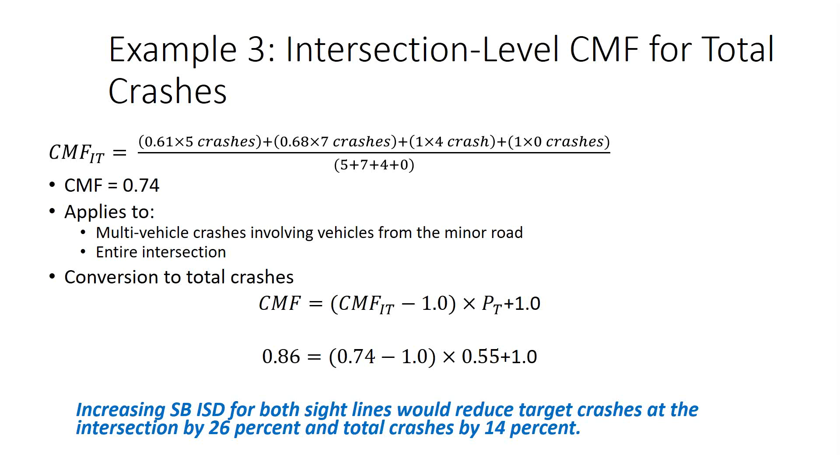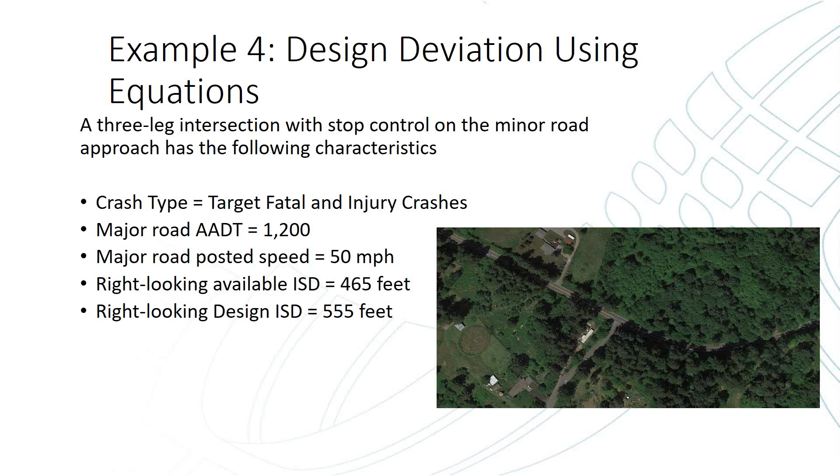Our right-looking available sight distance is currently 465 feet, but according to the Green Book, the right-looking design intersection sight distance should be 555 feet. So we're interested in finding out what the safety impacts of not meeting the criteria are.

So we can plug the values into the equation. Here we substituted 50 miles per hour in for the posted speed limit. At the top of our equation, we've taken the existing conditions, which is 465 feet. And at the bottom, we've looked at the proposed conditions, which in this case is the design condition, which is 555 feet. And you can see that by not meeting the criteria, we get a CMF of 1.06.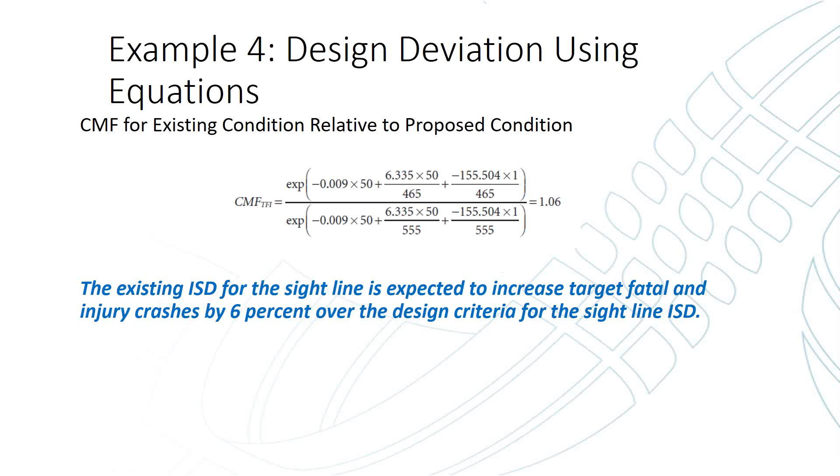So the existing intersection sight distance for this sight line is expected to increase target, fatal, and injury crashes by 6% over the design criteria for that sight line's ISD.

And then moving on in the guidance document, the fifth chapter focuses on other considerations and resources. This chapter provides countermeasures related to intersection sight distance. However, ISD is just one consideration for intersection enhancement.

There are other effective countermeasures available to practitioners. The countermeasures for ISD can be categorized with other measures that improve intersection safety and should be considered in a comprehensive approach to intersection safety.

So countermeasures that are listed in the chapter include clearing sight triangles as much as possible without geometric improvements, or doing geometric improvements to improve the ISD.

And then we have a category here for increasing awareness and visibility of the intersection. So there could be enhanced delineation leading up to the intersection, larger regulatory and warning signs at the intersection itself, adding splitter islands on the minor road approaches, adding intersection lighting, or adding overhead flashing beacons.

Additionally, you could provide warning to the drivers of the presence of conflicting vehicles. So that's looking at intersection conflict warning systems, where you could tell the driver that there's an approaching or conflicting vehicle when flashing. Then we also have choosing the appropriate traffic control listed here.

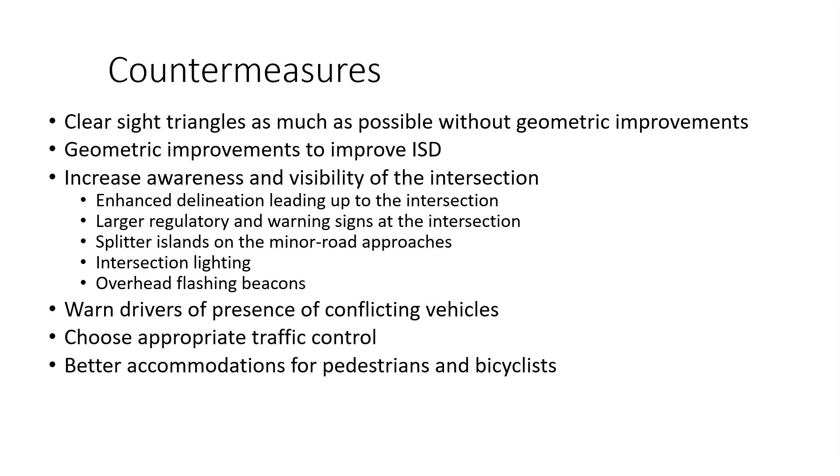And then the final chapter is included just to provide the base equations for your reference in the guidance document.

So in conclusion, the target crash frequencies do increase as available intersection sight distance increases. As expected, the relationship was found to be nonlinear, and the sensitivity of the number of target crashes to changes in ISD is highest when intersection sight distance is shorter, and that sensitivity decreases as intersection sight distance increases, showing that it flattens out as ISD increases.

The results suggest that the impacts of intersection sight distance on crash frequencies vary as a function of the major road AADT and the posted speed limit. We looked at the minor road ADT, but did not find it to vary in this case with ISD.

I did want to highlight that the research focused on a random cross-section of intersections, and this was done independently of crash history. The CMFs in this case are going to probably be somewhat smaller than if you develop CMFs for before-after conditions for intersections that have received intersection sight distance improvements, because it's just impractical to go and find those currently.

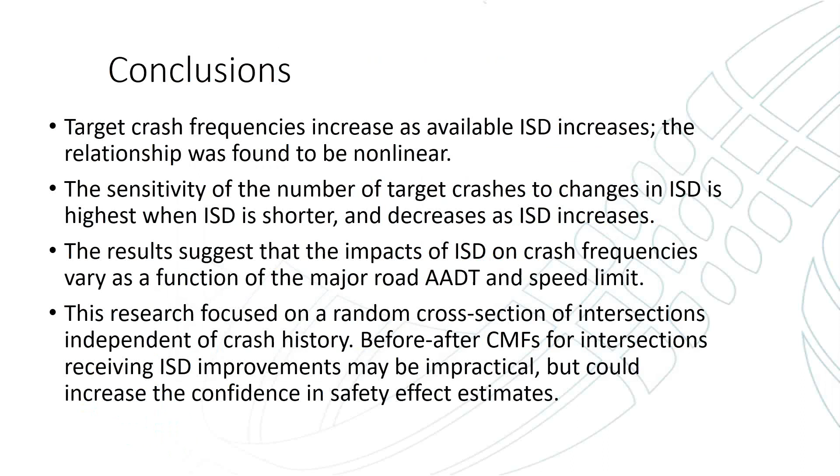Roundabouts. This research... sorry, can you say that again? Roundabouts - are roundabouts considered at all in this research? No, I don't think any of the sites in this research were roundabouts.

Someone says, I may have missed this - are the 12 practical charts included in NCHRP 875? Yes, they are all included in the guidance document 875, and they're all in chapter 3. I felt it wasn't worthwhile to go through each of them individually, but all 12 charts are in the guidance document.